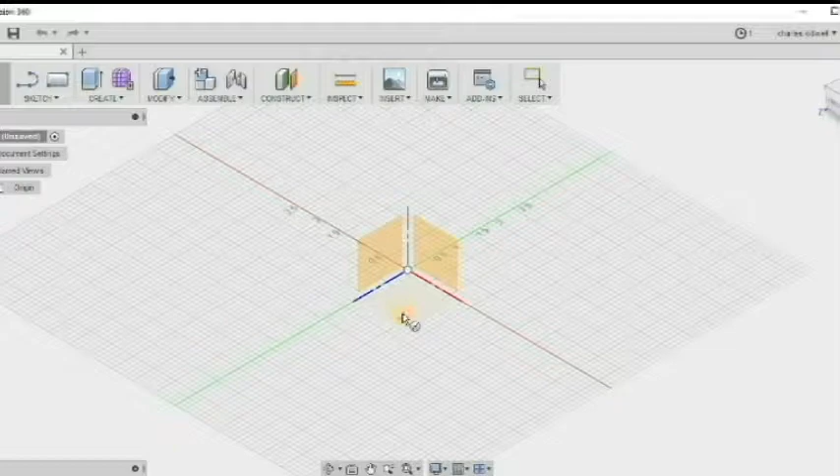Draw one circle. That'll be your outer portion of the wheel. We'll draw another circle. That'll be the lip in between them, and then the inner pocket.

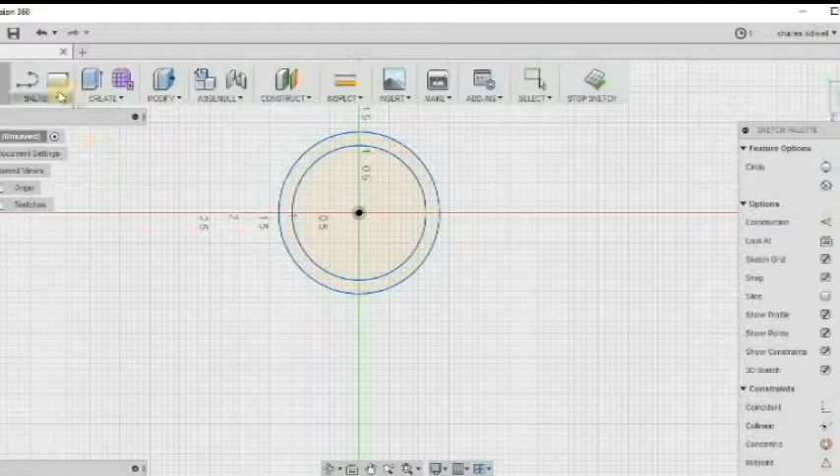And then we'll draw a hex in the center, essentially a center cap, or well, on a real wheel it'd be the center cap, which typically would be a completely separate piece. And you've got multiple options for hexes in there.

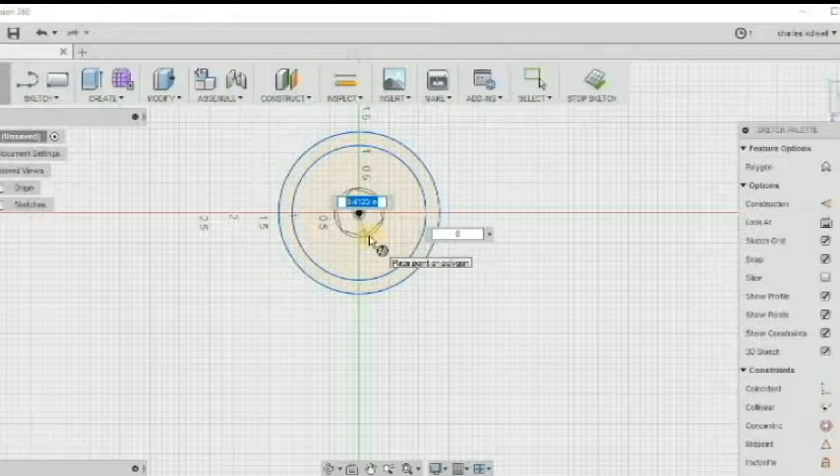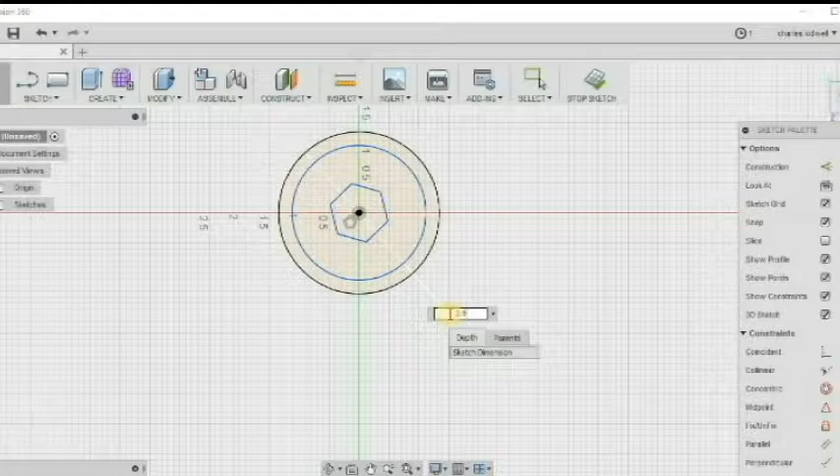I just pick where the circle's on the outside, how big of a circle you want. So basically point to point would be your diameter. If you did an inside circle, it would be flat to flat. And I'm just pulling the numbers out my rear like I normally do. I'm not trying to make it exactly the same way as the other one, just giving you a general idea of how we would do this.

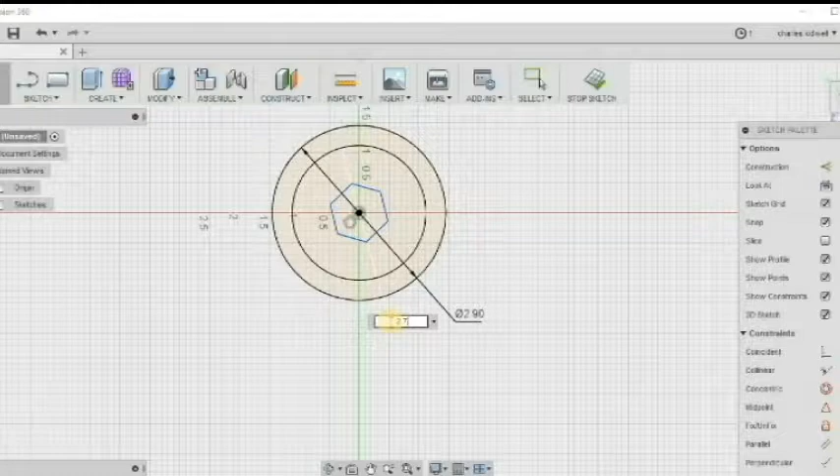Now I already had probably about a 3-4 foot section of 3-inch 6061 solid stock, which is why I chose to do a wheel. Again, this was to get a couple of the neighborhood kids, my son's 8, and a couple of his friends, same age range, a little bit interested in it. Let them see what you could do with some of these machines.

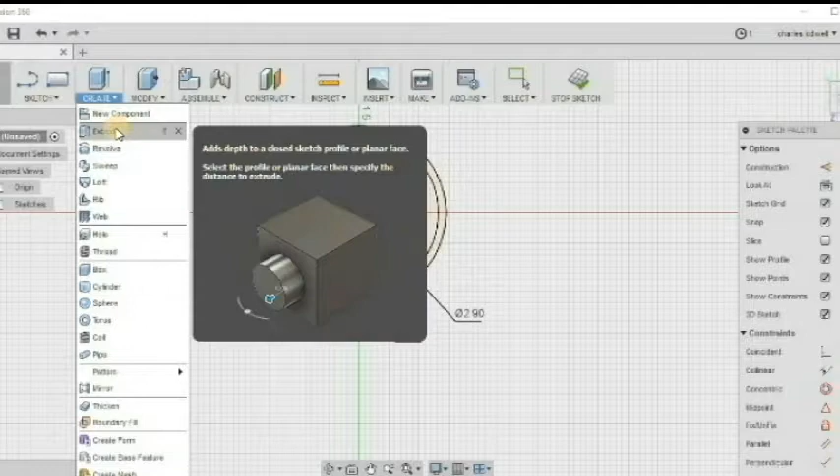So here we'll go ahead and do the extrusion once we've dimensioned the circles the way we want them to be. So basically the outside diameter that we're going to machine it to. Sorry about that, that's my phone. And then the inside diameter, basically giving it the lip thickness.

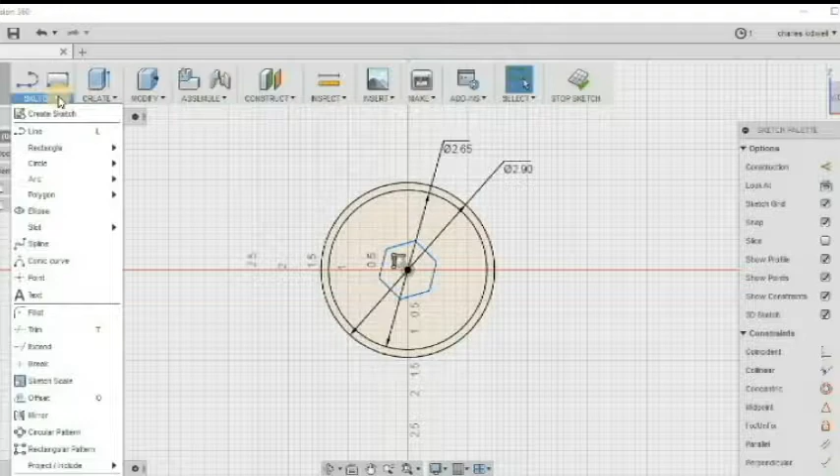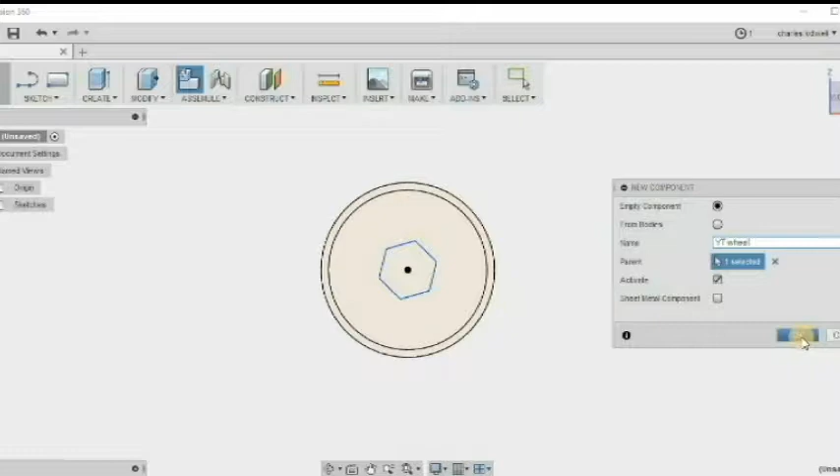Alright. So we'll go into create, pick a... actually I'm making a new component. I should have done this from the beginning. That's the way I should have started, was off a new component, because now my sketches are separate from my component. So I should have started a new component first and then went into my sketches, but we're already past that point. So I went ahead and created a component, and now we'll do the extrude.

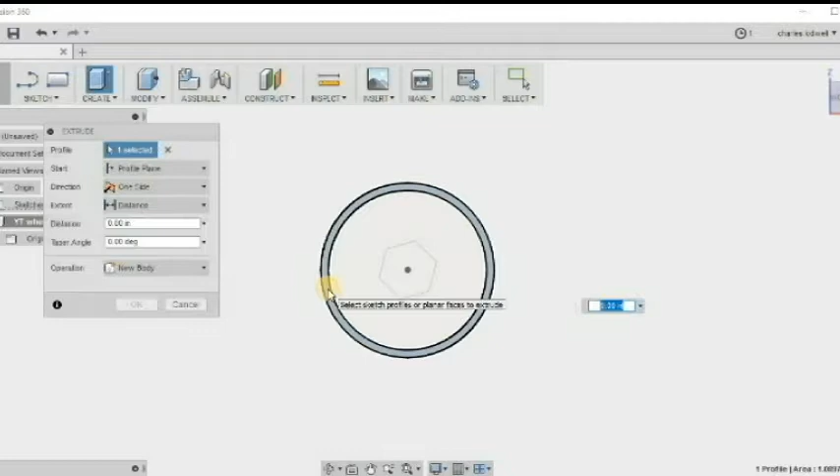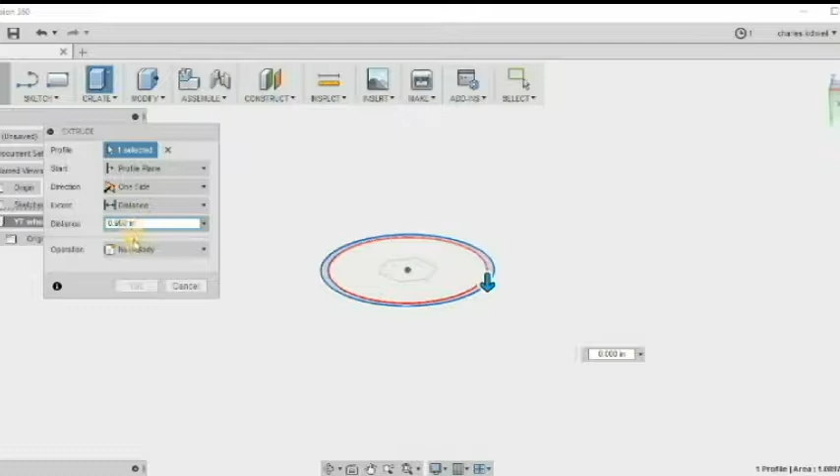And since all 3 of them are different, I'm gonna do 3 different extrudes. So we'll extrude the outside. On this one, we're going to extrude it from the mid plane both directions evenly. So we'll click on our distance, tell it how far we want it to go. That's only from the sketch plane, I believe it is. So we're going to pick symmetrical, so we'll do it evenly on both sides.

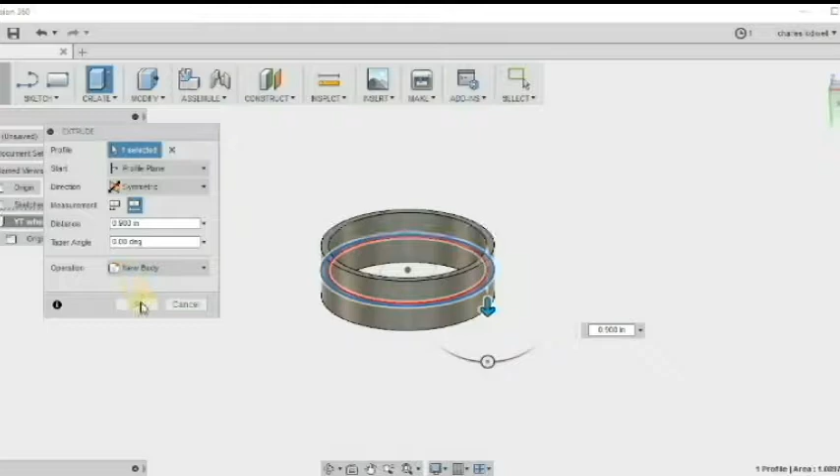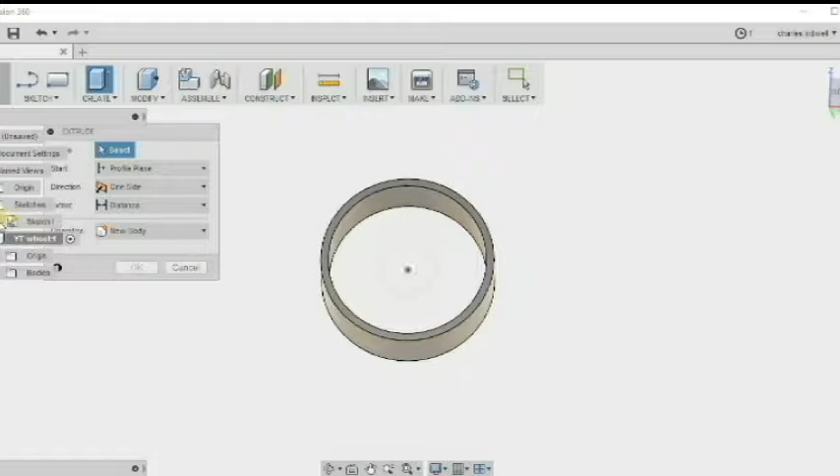Now we can look at it and see that it went too far, so we want it to be the overall dimension, not 1 inch per side, but 1 inch overall. So now we got our outer ring. So we'll go back in, create another extrude. Of course our sketches are turned off, so we'll go over there and turn our sketches on so we can see what we got there, even though we didn't really need it.

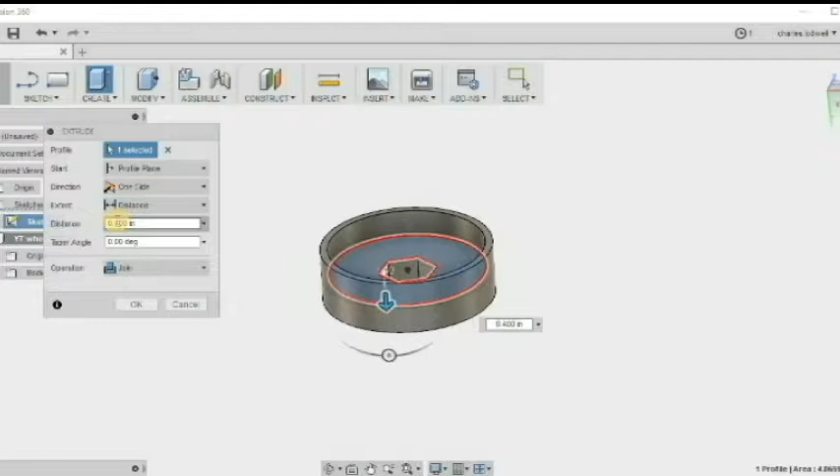We'll pick that bottom section. I always turn it so I can see which way the arrow is going. We'll give it a distance, basically how far we want it to extrude. Now this one we'll keep from the sketch plane, and we'll just tell it how far we want it to go. So now we got the outside and the middle section constructed. So now we'll do the hex in the center.

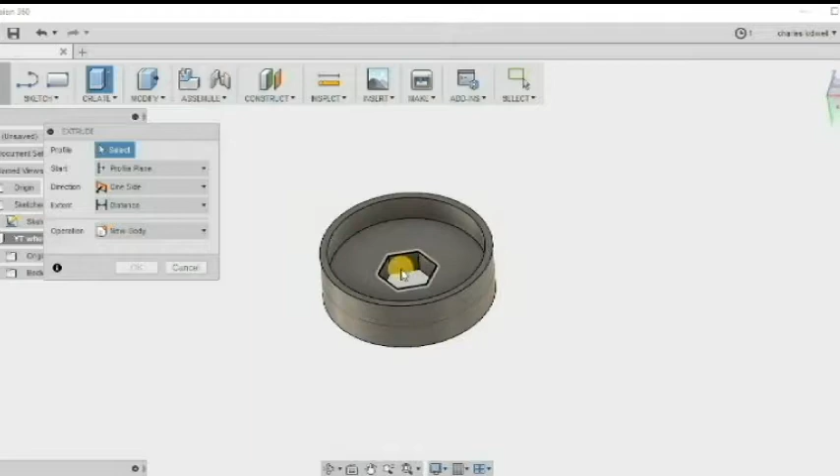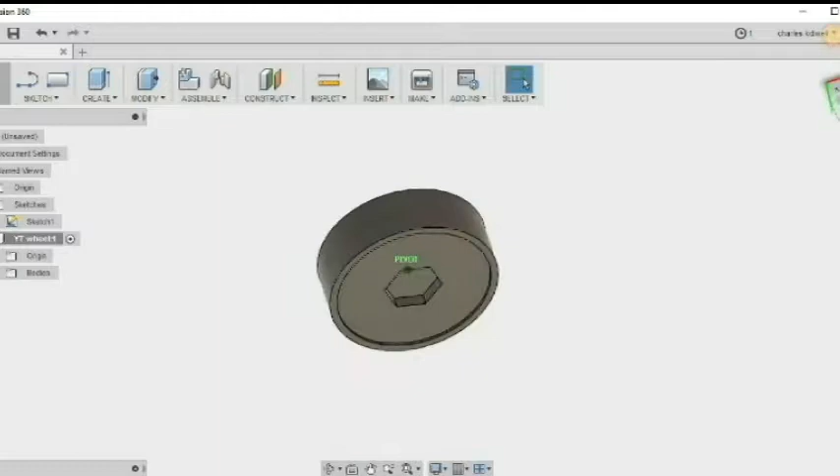Now this one we're going to switch to symmetrical, which means it's going to go both sides of the sketch plane evenly. We're going to tell it that whatever number we punch in, it's going to be the total distance. So you can see right here we screwed the pooch. So we'll go back in and edit the feature.

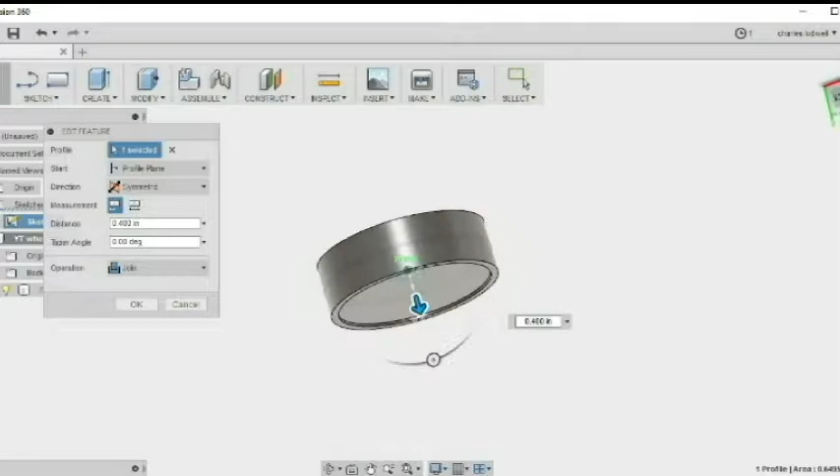Actually the number that we put in was only half the number, because we wanted to go 0.4, so we should have typed in 0.8 for the total distance, but since we put in 0.4 we went back and just changed it. That way it was doing 0.4 on both sides.

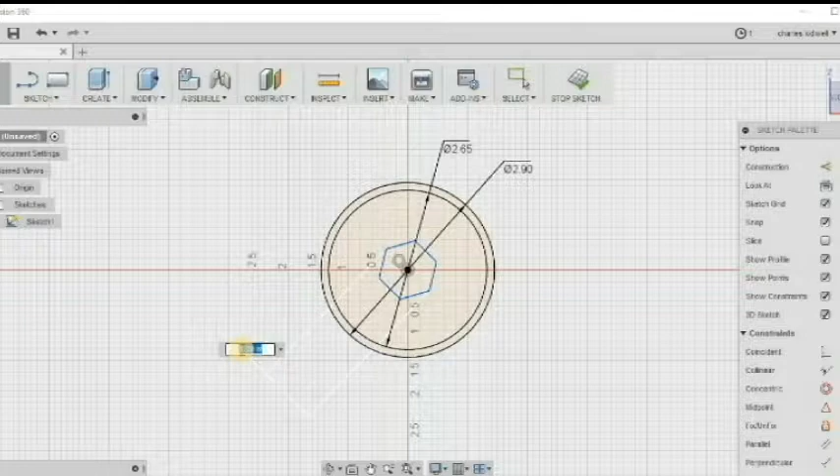And we think the hex is a little big, so we'll go back in and change that, make it smaller. That way it'll give us room for the flames and all that. So there we go. We basically got the basic shape done.

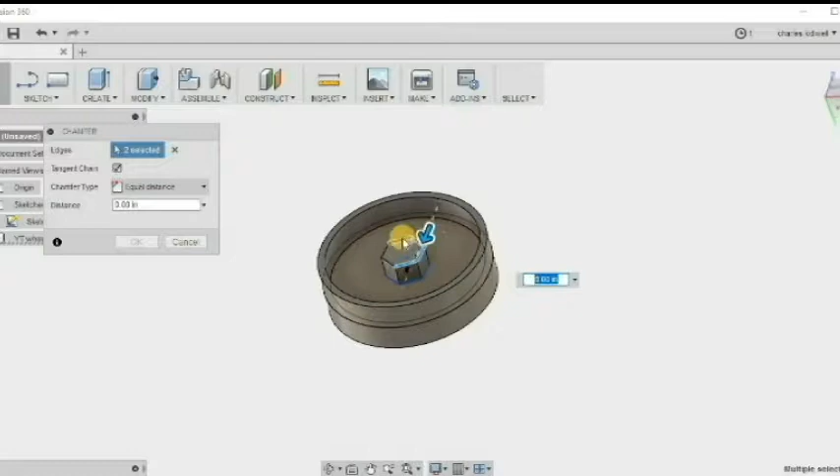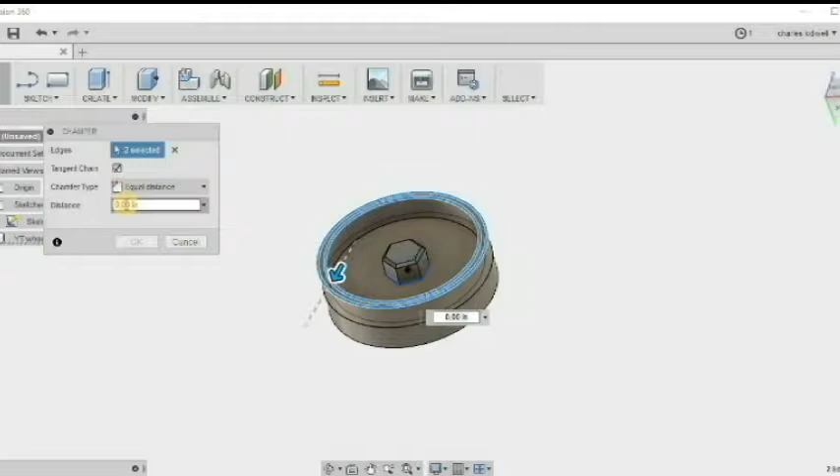So now we're going to go in and put some chamfers on some stuff. So you go into modify and pick your chamfer. We're doing equal distance. Tell the distance we want, and again, since these are going to be different size chamfers, we're doing them separately. Same here, equal distance. That drop down right above will allow you to type in whatever chamfer it is that you want, or give you the option to select it, then you can type it in.

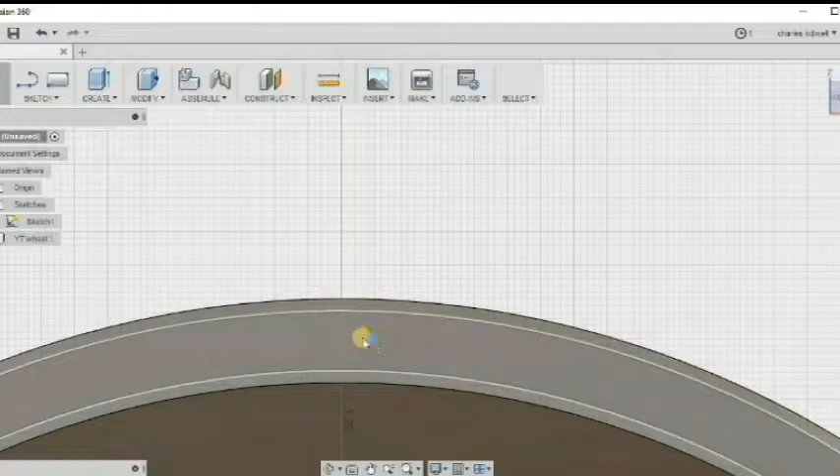So now we're going to put in the little, the wheels have those little, usually socket head cap screws all the way around them. I'm not sure the purpose of them other than looks. So we're going to go ahead and put in some details here.

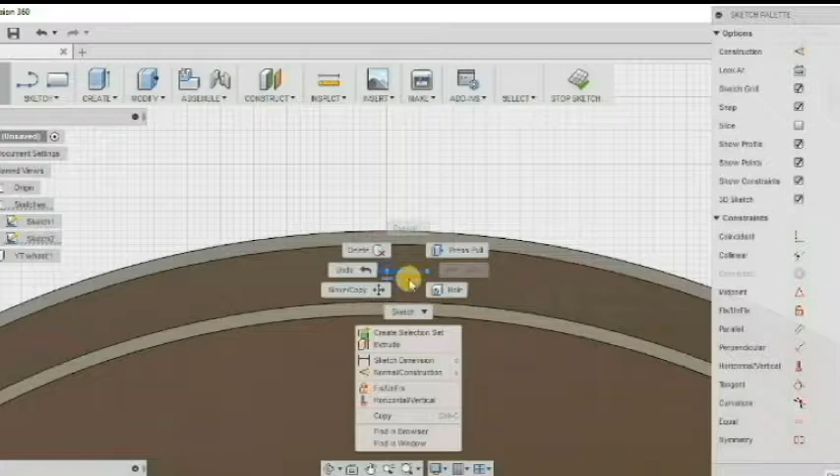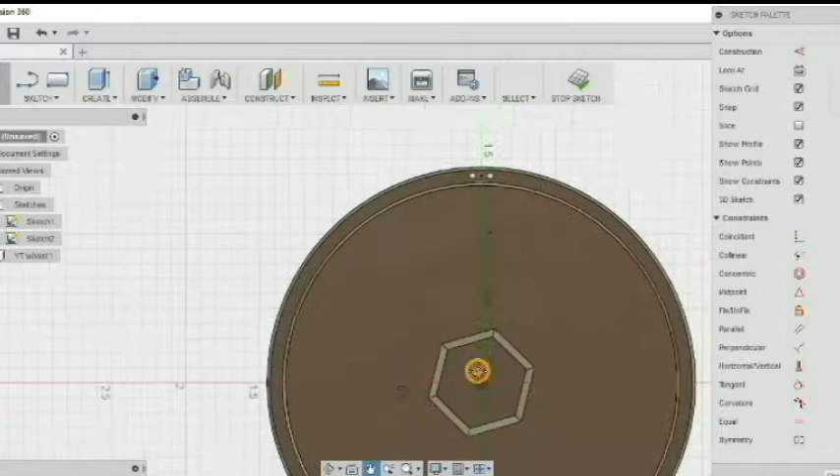So we'll draw a circle, give it a dimension, then we'll put a line in, and we got that line centered between the two, the inner and outer edges. So then we just make the circle coincident with that, and since it was already coincident with that green line, it put it right in the center where we wanted it, even though the green line wouldn't have really mattered for this. It just needed to be in between the two points.

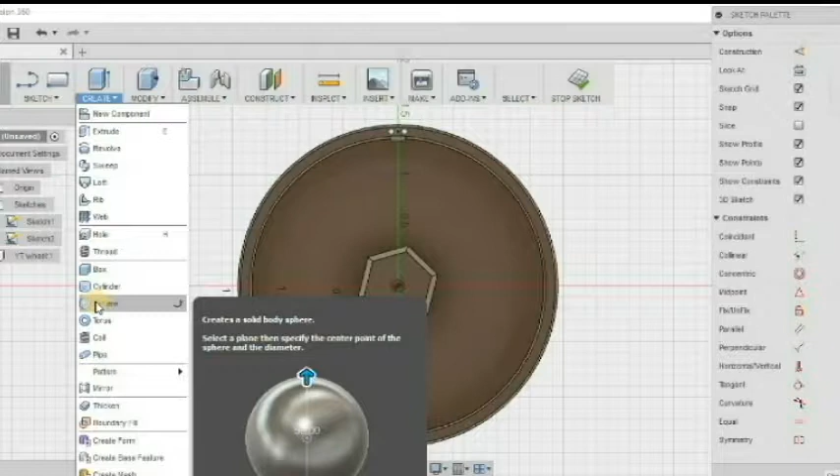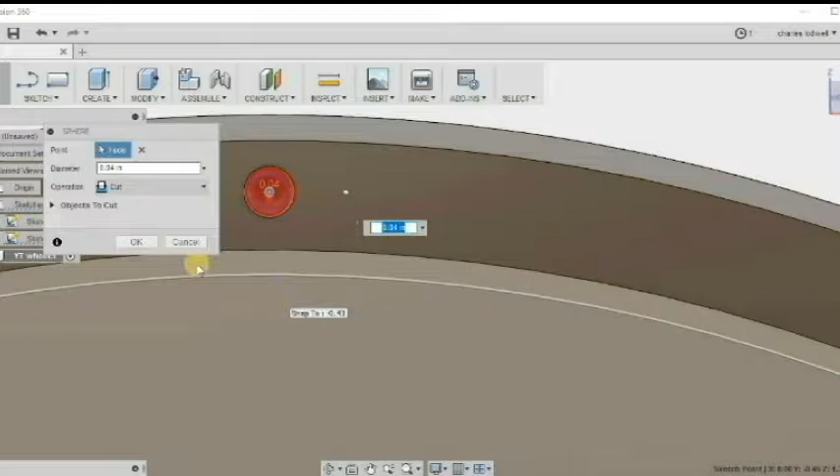So then we're going to go in here and we're going to make, I think it's called sphere, basically a ball. And we're going to pick that circle, and we'll tell it how big of a ball we want. And then when we click OK, there will essentially be half a ball in there. So if you're doing it with a ball mill, you could just come in and drop the ball mill in like it was a drill. But for this, what I did it with was a center drill.

It's for an 8-year-old. He don't know the difference. As long as it looks fancy for him, he was cool.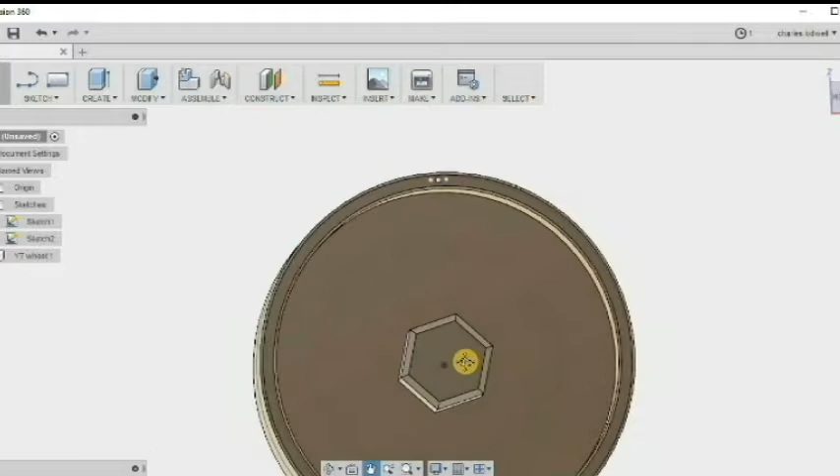So then we're gonna end up doing a pattern. So we'll go back into create, go down to pattern, do a circular pattern. You're going to select what it is you're looking to pattern. So we're going to pattern features. We'll zoom in on our little thing so we can pick it. Although I'm not sure that that's how we did it.

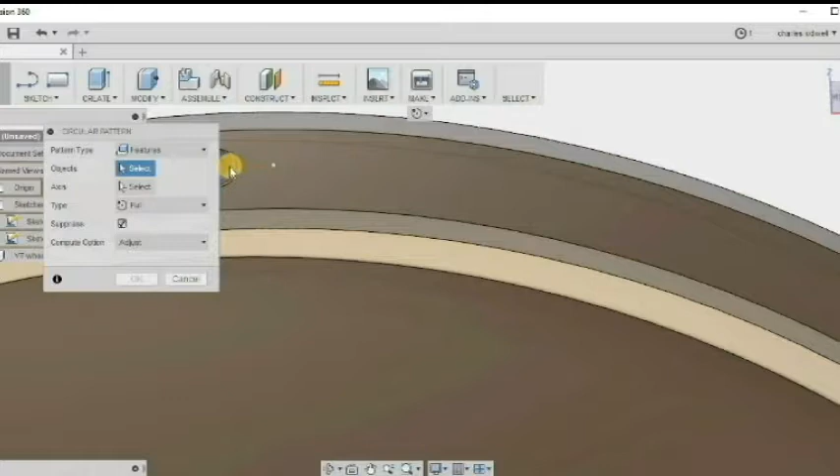I had trouble getting my microphone to work, so it's been some days I've been working on this dang thing. I can't remember what the hell I got going on.

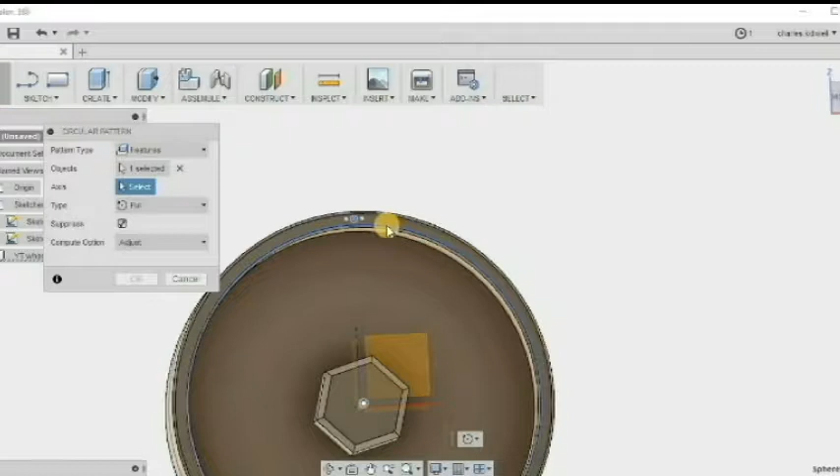Yeah, so I selected down at the bottom is what I did. Select the spherical feature, then pick an axis, which I was trying to pick that center point down there. I don't know why it wouldn't let me pick that, but whatever.

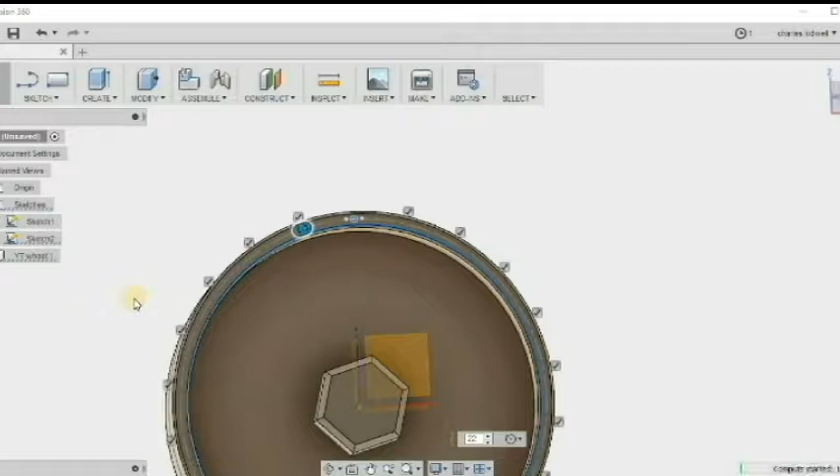And then I basically just keep hitting the button until I've got a spacing with the little check marks you see on the outside. You can uncheck them if you don't want one in that instance. You can uncheck each one of them and it'll not place it there. So there you go. Now we got our little dimples all the way around it. Pretty fancy stuff, huh?

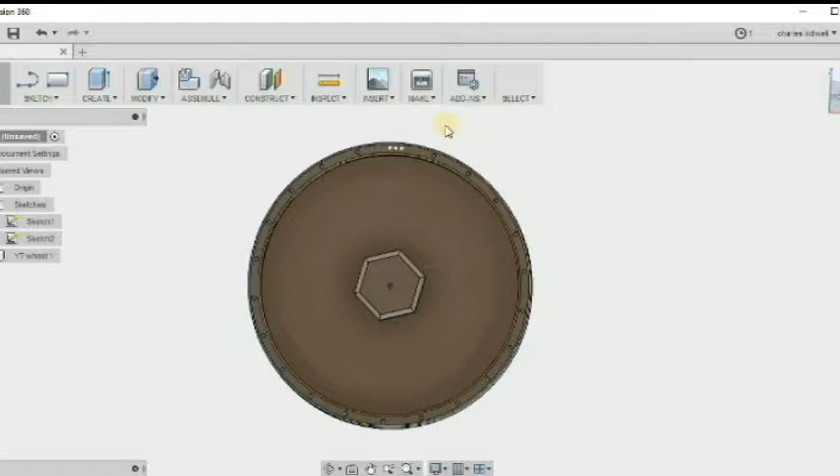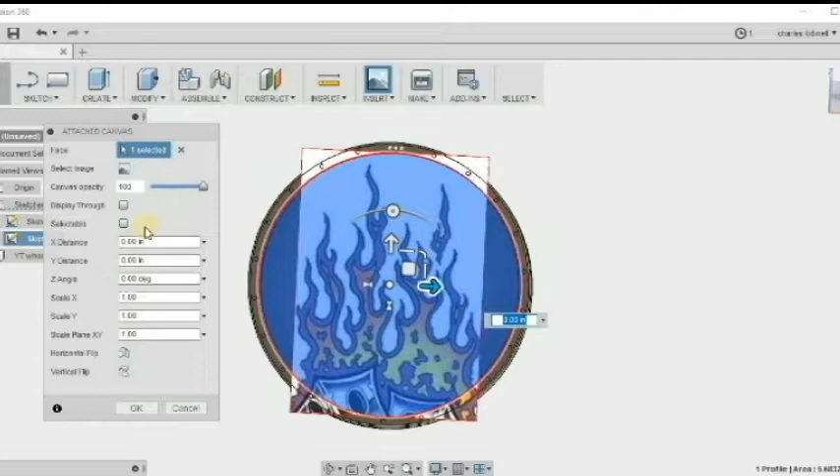It's really pretty rudimentary. So now we're going to insert a picture. And I just went on Google and searched cool flames or some crap like that to find the flame image that I wanted. Then we just select the image, import it, use little arrows and all that crap to resize it.

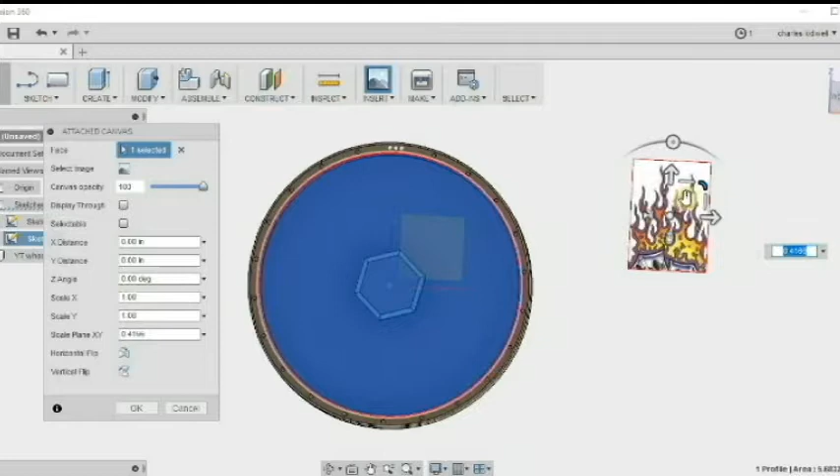The square, you can drag it, but you'll see on the upper right hand corner of the square, you can grab those bars and resize it like we're getting ready to do. So we'll grab the center radius bar, and that'll move the whole thing in one. Or you can grab the side bars and move each side individually. So we're going to move it out of there, and then we'll rotate the wheel a little bit just to get it on that flat spot.

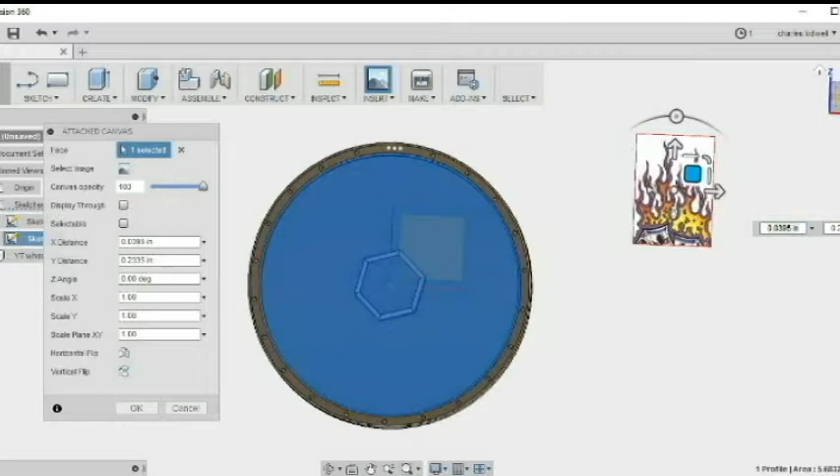It doesn't really matter. I'm just kind of weird like that. It doesn't look right to my eye, so I gotta change it, I guess. I'm weird that way, maybe.

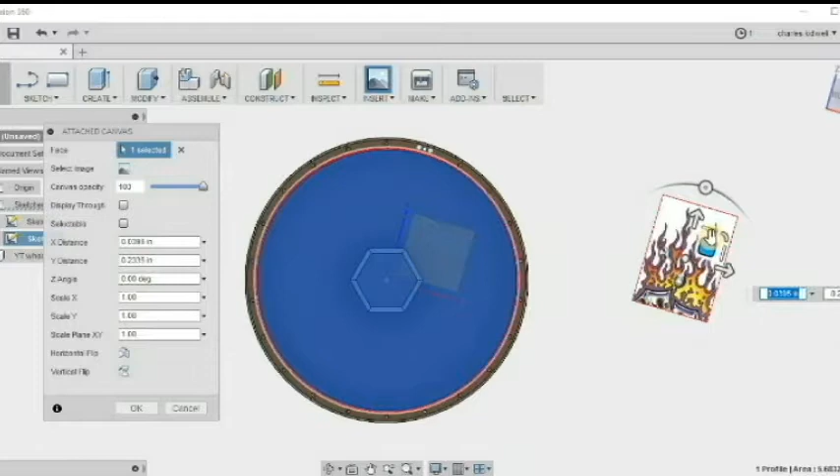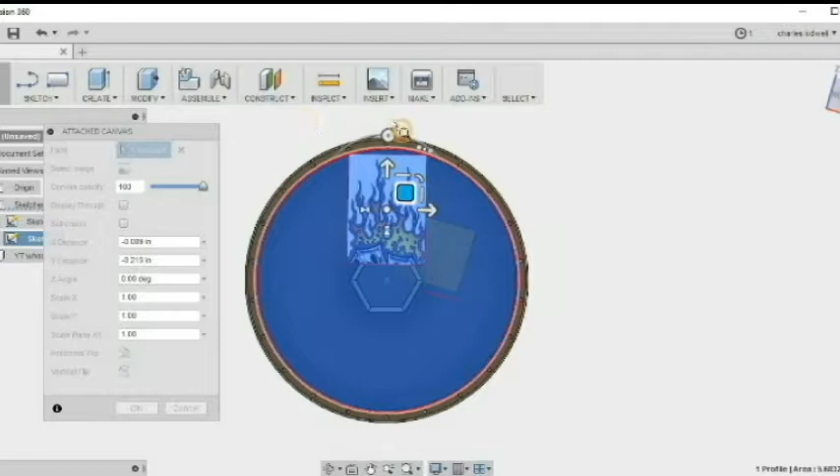Then we'll rotate the flames to make the flat line up with the flat. But again, it didn't make a damn one way or another. I'm just the way I am. So there you go. We'll place the flame there. Now we'll zoom into it.

Now we're going to do a spline. And this probably isn't the best way to do it. I mean, you could have imported it and turned it into a vector and probably just had the outline of it for what I was trying to do. But I learned that after the fact on a Titans of CNC project that I was trying to work on. I believe I got the idea first from John Saunders and then just went searching. So basically I'm just drawing the spline wherever there's a curve at, there's a point.

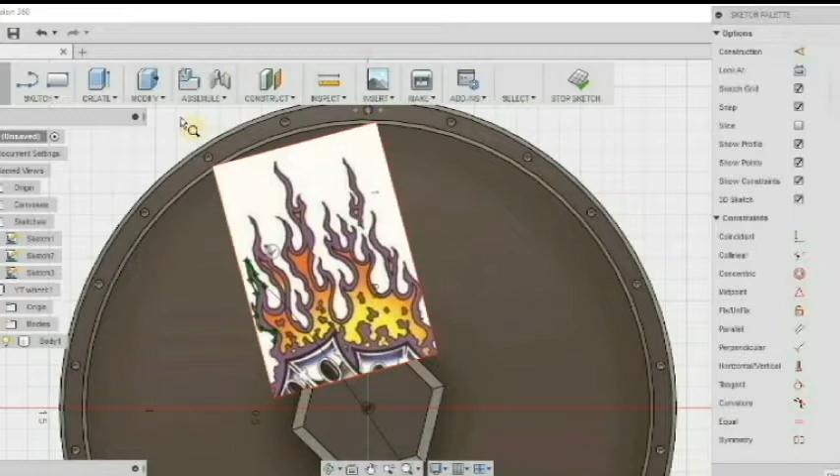It doesn't always work out the way you want. A lot of times they're bending in the wrong direction. You'll have to go in and add points. You can subtract points, move points. But you basically just get it there, then we'll turn the picture off. And then once the picture's off, we can go in and adjust the spline points to where it looks like a flame, because it's going to look like a hot mess. As soon as you turn the picture off, it'll be horrendous.

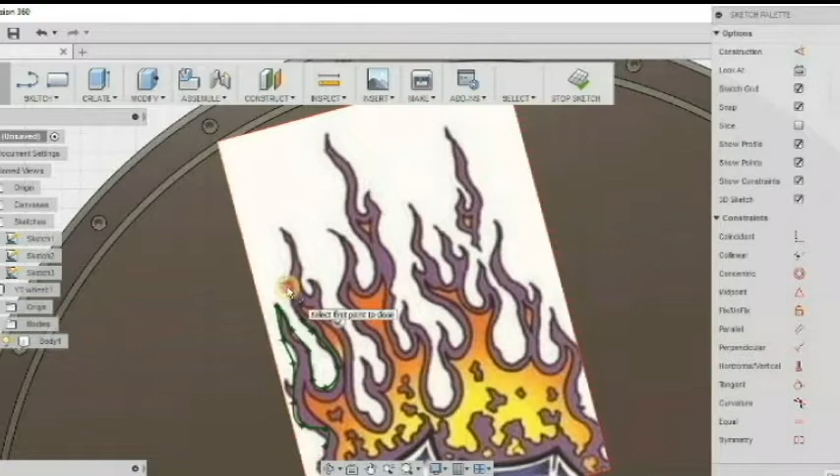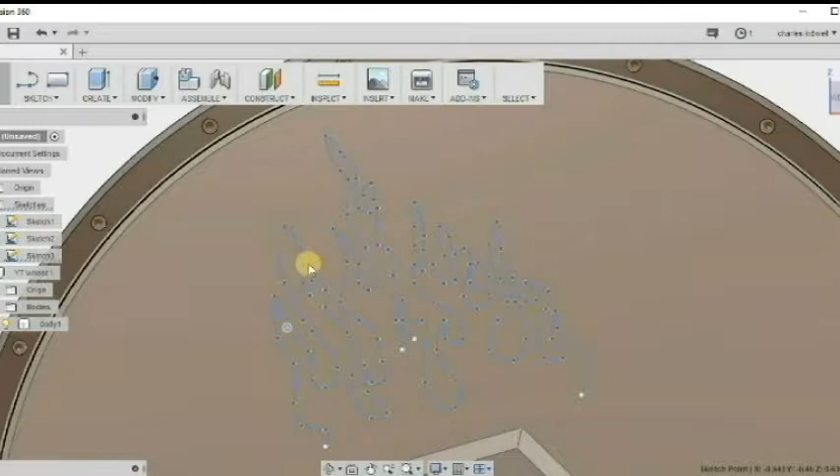You see how that one there was curving in the wrong direction. As you can see, some points look decent already, and a lot of it is just where the splines were rolling in the wrong direction, so on and so forth. So you just got to go in and, like I said, drag them, rotate them, delete them, add them, whatever it is that you have to do. Like this one right here, no matter where you drag it, it's still going to be rounded. So I had to go in and actually add a point on that spline to get it to bend the direction I wanted it to bend.

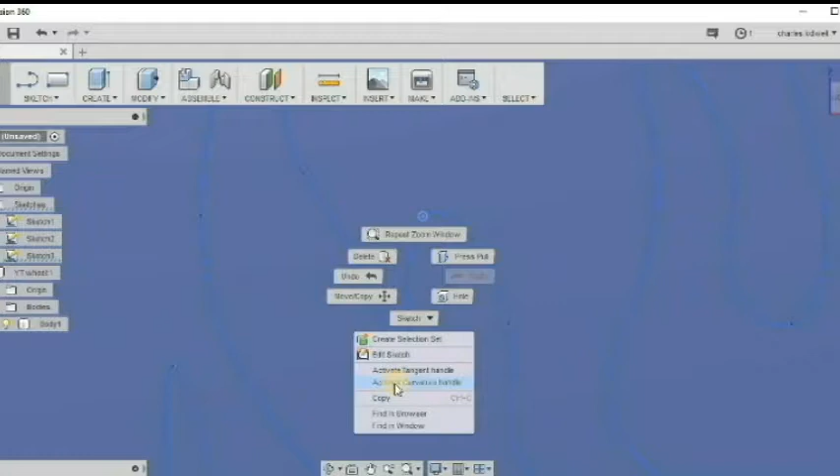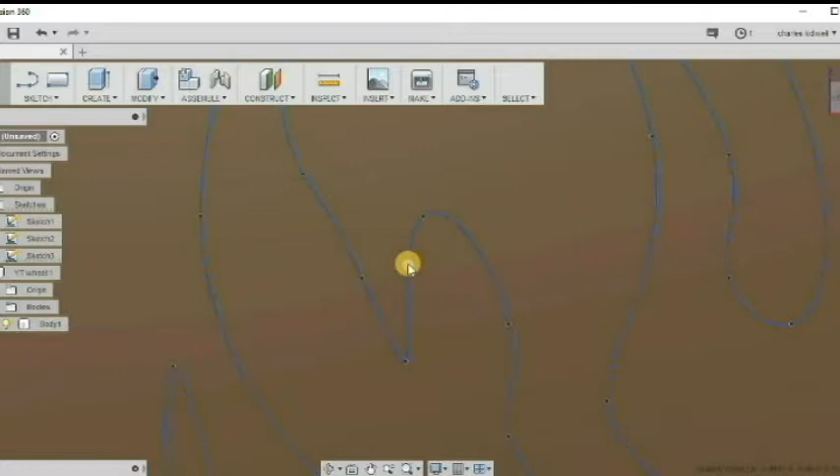You could have grabbed a bar and adjusted it, but sometimes things get screwy, especially if the radius gets funky on you, because then every spline after that you get yourself in a wormhole, and it can be a pain in the ass to get back out of that wormhole. So right here I'm adding a spline. You just right click and hit add spline, and then it'll give you the little arrow that comes up. You basically place it where you want it, then you can drag it anywhere on that spline that you need it. But this is the same thing. You're getting that rounded in because I didn't have enough spline right there to pull it to a sharp point.

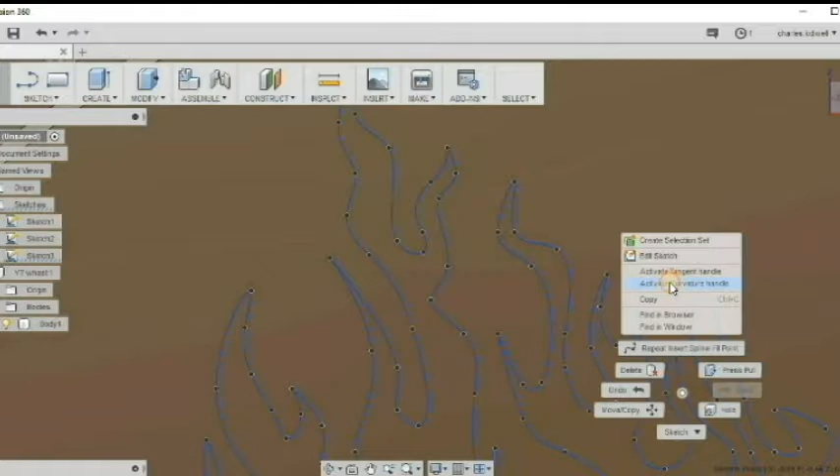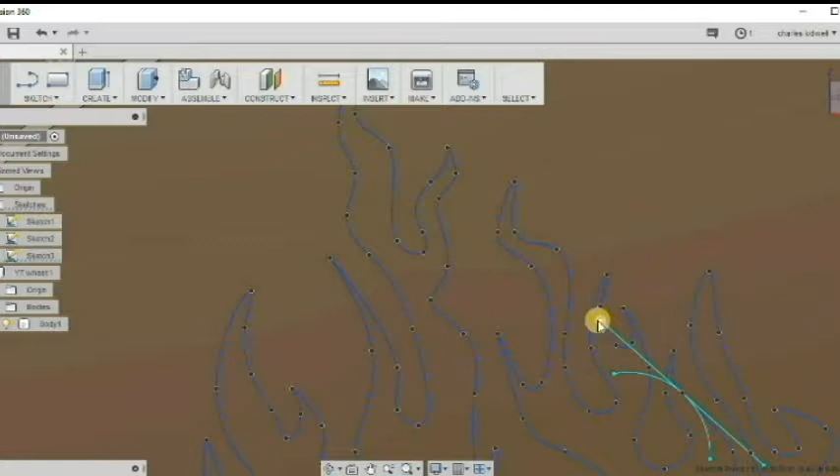So you basically just drag these things and move them until they look good to you. There's no scientific approach to doing something like this. Whatever's appealing to your eye. Again, right click. In this case, I'm actually going to rotate it. You can see the radius portion. You got the straight bar, which will change the pitch of it. But that radius portion will change the radius that's actually there, and you get it locked into a funky radius, and it's just a pain in the ass sometimes, especially with my slow computer, where I can click on something and it's not moving like it should, and by the time I get it to move, I've already drug it too far, and I just find myself basically chasing a ghost.

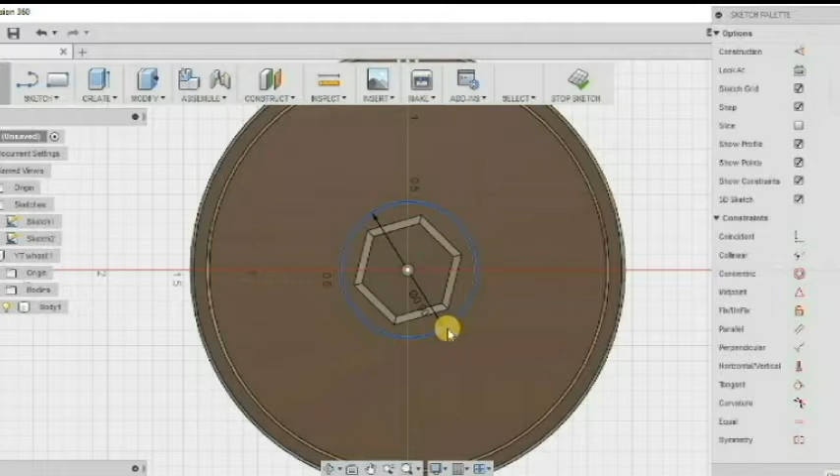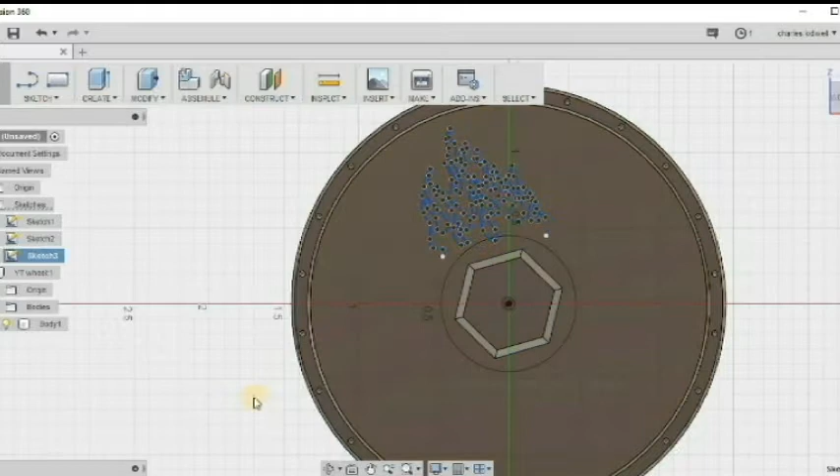So now I put a sketch circle in, basically just to connect the ends to. Again, it's not really something that had to be done, but I'm weird like that. I just have to give it a finish, I guess you could say. It's not finished right here, so I have to finish it. So I'll have to drag any points below it up to the circle, any points above it down to the circle, or add more splines, or whatever I got to do to complete the madness. But in my own head, I just have to do that. It just seems incomplete otherwise.

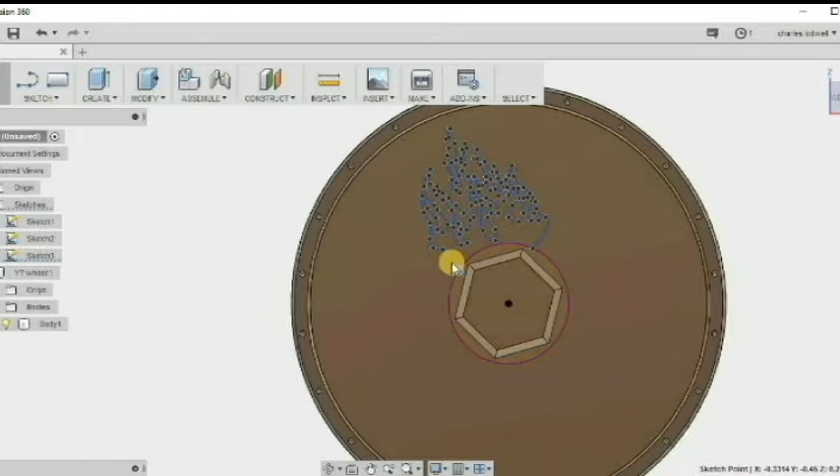So basically on there, I'm just putting a spline. I'm putting 3 points: the initial point on the point that's already there, a point in between the circle and that one, and then a point onto the circle. That way, with 3 points, 2 of them are locked in, and then that third point you can just drag it to get a radius, instead of just a sharp line like how it looks right now. It just looks like a sharp line on the right.

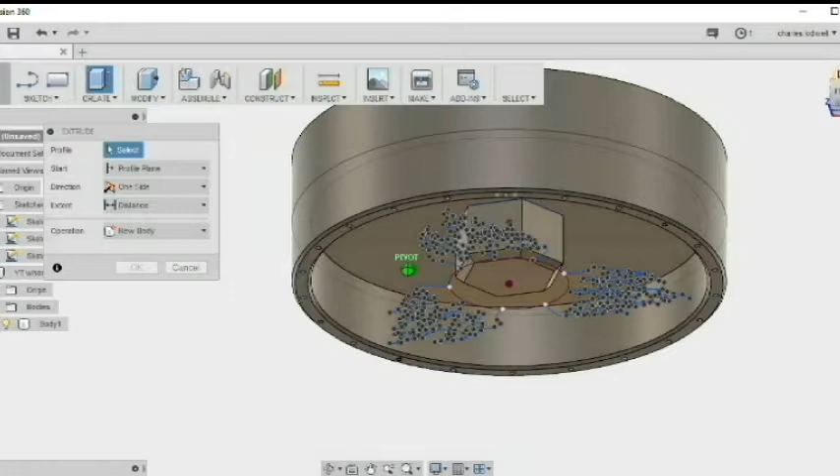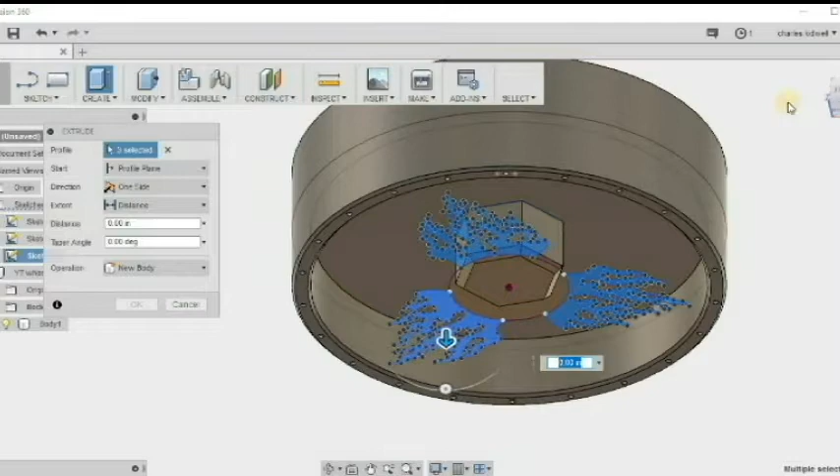So then I just do another pattern, go into sketch, do a circular pattern, right click and drag to the left and down and capture that whole spline, rotate it 3 times. Then I have to rotate the wheel around to do the extrusion. Even though this is an engraving, I just don't like the way the sketch just looks sitting there, so I extrude it just so it looks good, because I can still engrave on the profile anyway. It looks better as a model when I can see it versus just some sketch sitting there.

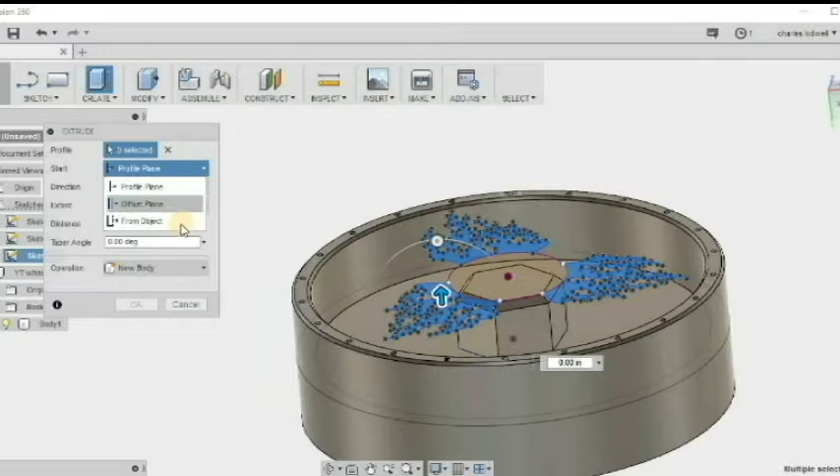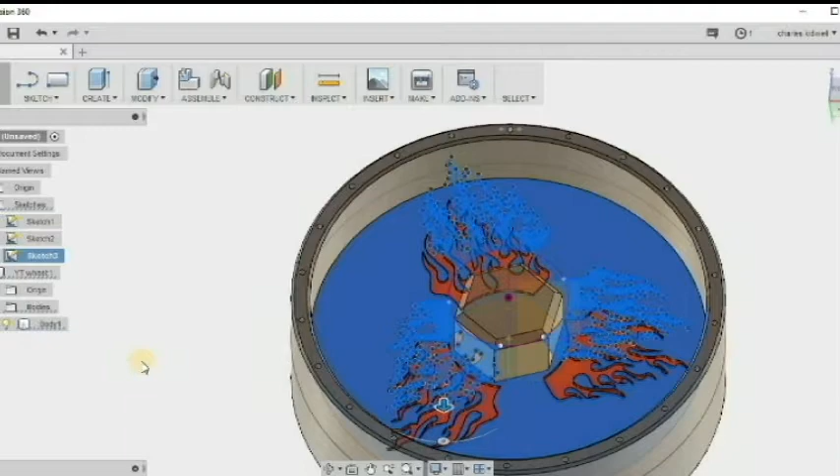So now instead of doing it from the profile plane, since the sketch is drawn on that top profile, I'm going to tell it to do it from that selection right there. And then I'm going to tell it to go down, I think it was 10 thousandths, minus 10 thousandths, maybe 20 thousandths. So there you go, now we got flames down there. And you just turn the sketch off. That way you don't have to see it anymore. But you see how the bottom section looks so much cleaner when you attached it to that radius.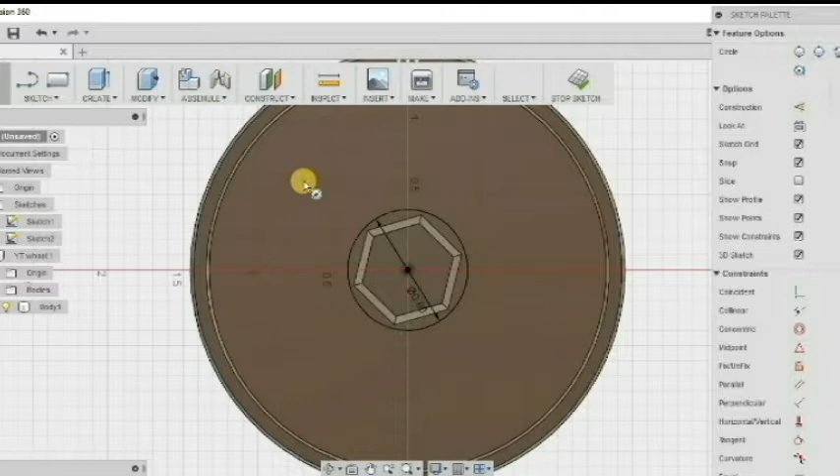So now we'll draw the pockets into it. Now when I drew the first ones, I wasn't thinking of the radius. That's how I broke that 1/2" tool. I drew the corners too small, and I did it all with splines. So on this one, what I do is I'm going to go in and draw 3 circles, which are basically my 3 corners. And I'm going to make sure each circle is more than 1/4 inch, which is the tool that I'm using. I believe I went with like 0.3 or something like that. That way it doesn't load that tool up so much when you slam into those corners.

And then once we've drawn the 3 circles, I'll basically go in and draw 3 splines. Kind of like how I connected the flames to the circle. I'll attach 1 dot to each circle and then 1 dot in the middle. And then you can drag that middle dot to give you a comfortable radius instead of just a straight line.

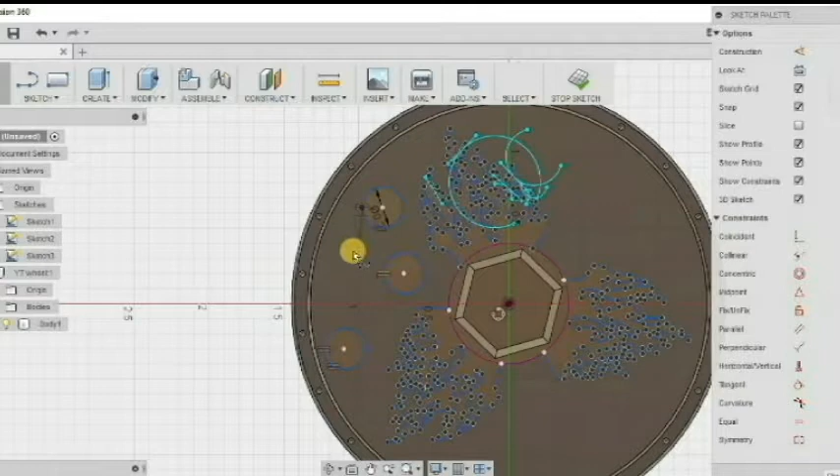So I'll dimension 1 circle, and then I'll constrain the other circles as the same diameter. That way, if you change the 1 circle diameter, everything's going to change, instead of just dimensioning 1 circle at a time, because then you got to edit all 3 circles if you want to edit the deal instead of just editing the one. So basically, like I said, put a spline in between each circle, drag the circles around where they look good, drag the splines around where they look good.

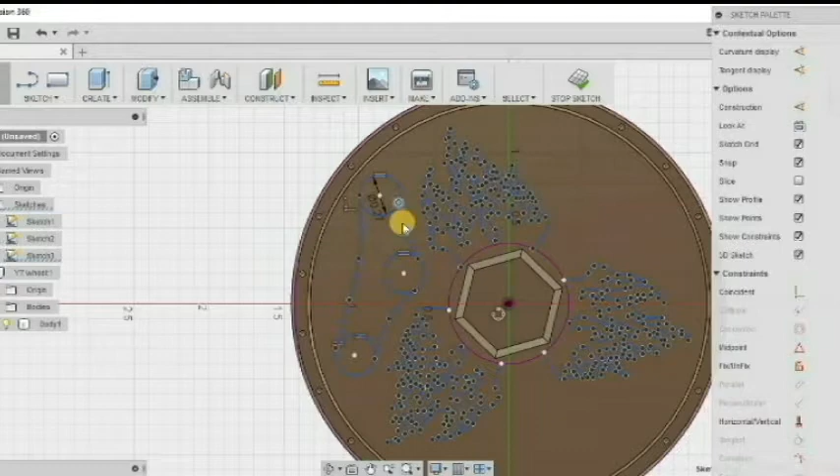Easy peasy. You got to make sure that your spline doesn't cross over your circle though, leaving little loops in there. I mean, for this it would still machine it, but it's just not good practice. Same with them flames. You get a lot of little loops in there where a spline's trying to cross over top of another spline or something. So again, you rotate it, that way you can pick it; for some reason straight on it doesn't want to pick it. Rotate it, pick the profile that you want.

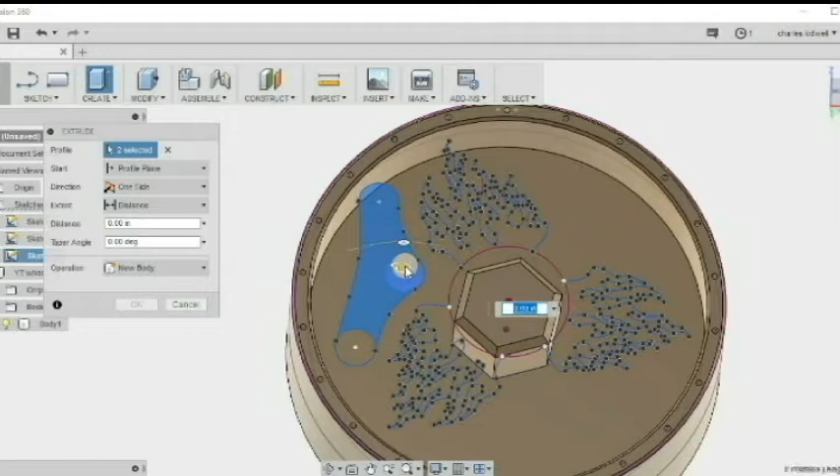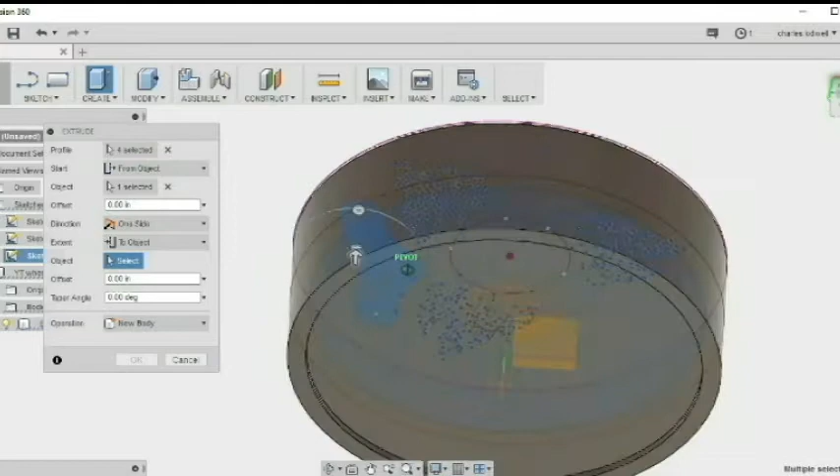One of the cool things about Fusion over SolidWorks is you can pick that profile without deleting all the lines inside of it. So we'll do the same thing. We'll tell it that we want it to cut from that selection, and we'll select the bottom profile. Then on this one, instead of giving it a depth, we're going to tell it we want it to cut to an object, flip it over, and pick that bottom face because we want it to go all the way to there. So there we go. Now we've got our hole popped in there. We'll turn our sketches off.

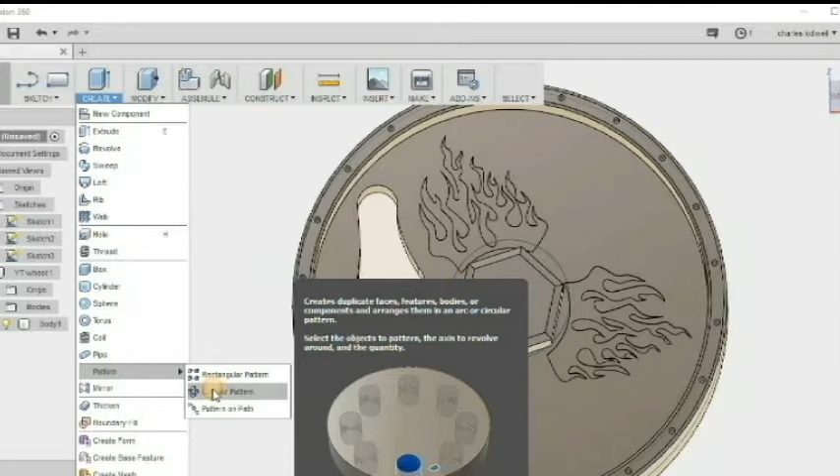Now we'll come into create, and we'll do another pattern. If you're patterning sketches, you do the sketch pattern. But if you're making a pattern with features, you go into the create and do that. So again, we'll pick the profile of the thing we want to pattern. We'll pick the circle in the middle because that's what we're patterning it around 3 times, and there you go. We'll have 3 patterns.

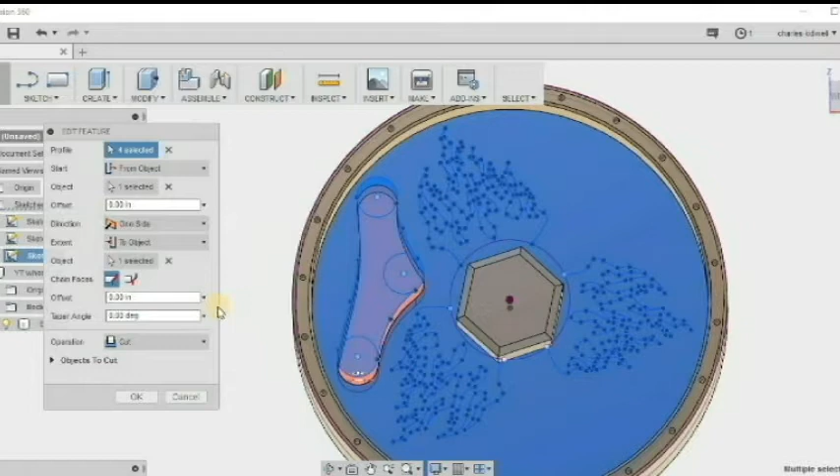So now we'll go back in, do chamfers. Now, if I was smart, I probably would have put the chamfer on beforehand and then just patterned the whole deal. So you want to tell it what size chamfer you want, equal distance, 20 thousandths, 50 thousandths, 100 thousandths, 2 inches, whatever it is that you want to do.

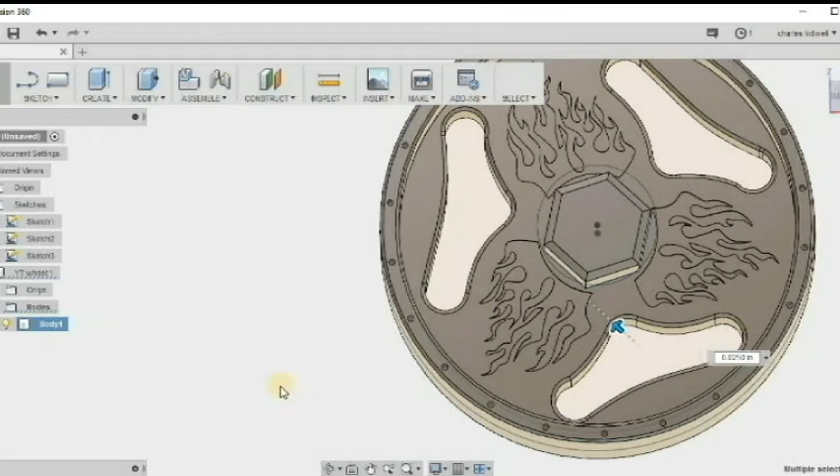And there we have it. A completed wheel, drawn and ready for programming, which will be the next video.